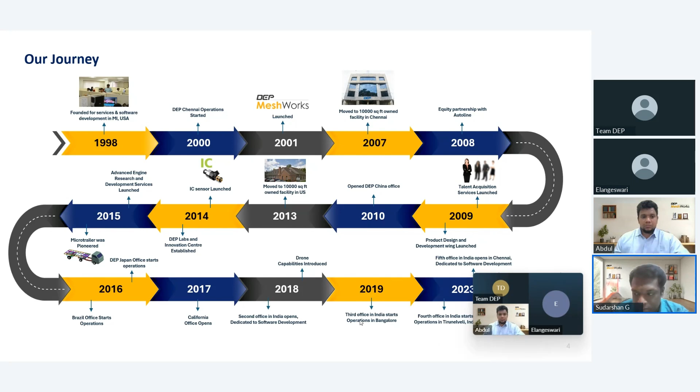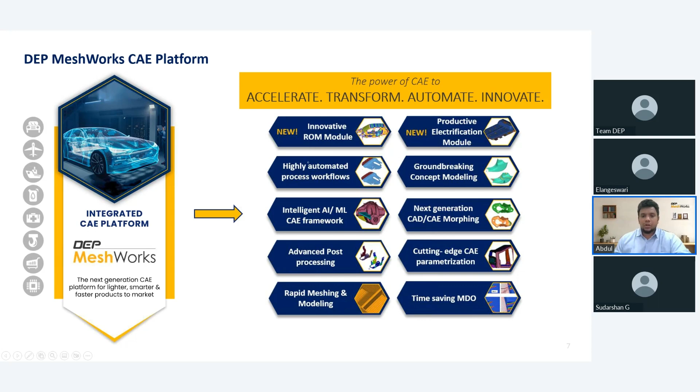In a product development cycle, whenever it comes to a new product development, it goes from the initial conceptual stage to the detailed phase, the virtual validation phase and the maintenance phase. There is a new product development cycle and an older product development cycle. In the older cycle, you can see a lot of time spent in the detailed validation, virtual validation and maintenance phases.

Why? Because not much time or involvement has been spent in the conceptual stage itself. In MeshWorks, we give the upper hand so the user can spend his time in the conceptual stage by doing all types of modifications, creating his own geometrical designs, etc. From there to the maintenance phase, we need fewer tools in the detailed virtual validation and maintenance phases, so less man effort is needed with MeshWorks. Our whole point is to convey how, with MeshWorks, one can save a lot of time in pre-processing, post-processing, and conceptual design stages.

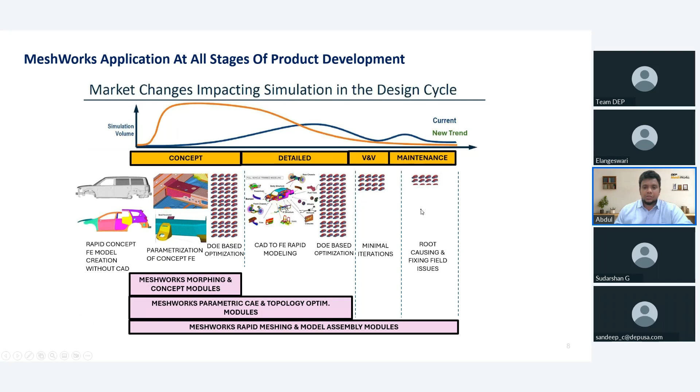In conceptual stages, MeshWorks gives a hand with ConceptWorks and also some morphing modules. In the detail phase, there are MeshWorks parametric CAE modules and topology optimization modules at a component level or an assembly level. And MeshWorks rapid meshing and modeling modules help across all the different validation stages. That is the main intention of today's presentation.

With that, I'll start with the first, which is meshing and modeling. When it comes to meshing as a pre-processing tool, we have automated all the different kinds of meshing with our machine learning algorithm integrated into it, starting from tetra meshing, be it plastics or sheet metal or hexa meshing, whatever it is.

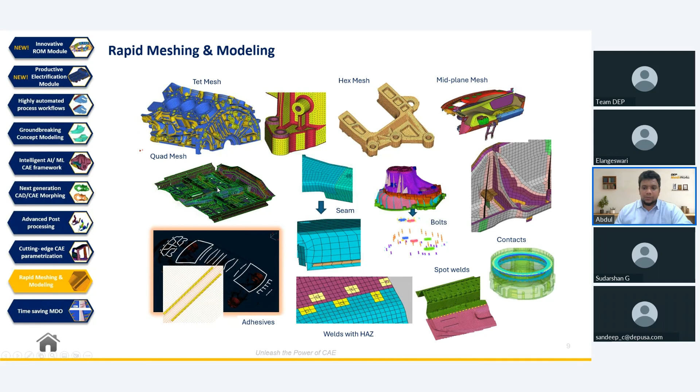So all the different sets of meshing have been completely automated, extensively benchmarked, and produce high quality, standard-rich mesh outputs. Once you do the meshing, obviously you need to go for the modeling.

But when it comes to meshing, the value you can expect from MeshWorks is that one doesn't need to do any kind of CAD cleanup in the prior stages. The user can directly take the CAD in and go for the meshing. And if the CAD is bad, you can go for the auto cleanup methods in MeshWorks. It will save a lot of turnaround time, in a huge way, when it comes to engineers doing the meshing hands-on.

And all the different types of meshing are under one roof. There is no need to switch between multiple software packages. You can club all the types of meshing into one particular tool, with cost and time benefits. And of course, you can see a 30 to 50% time reduction across all the variants of meshing modules. Once you do the meshing, obviously you need to do the modeling.

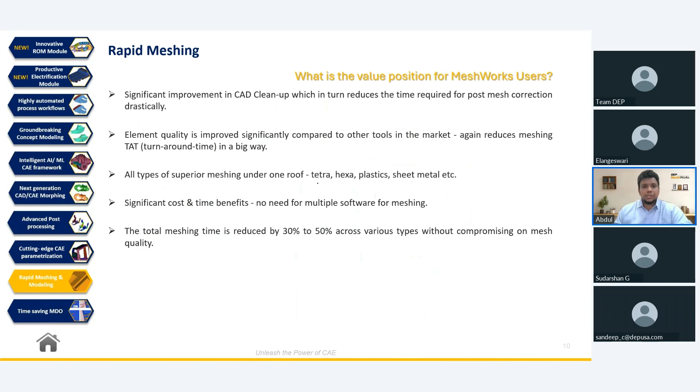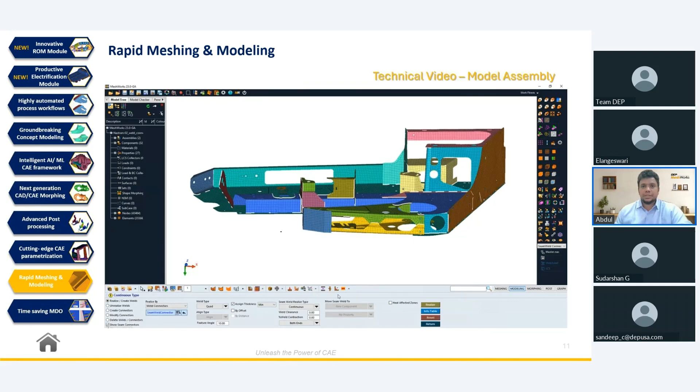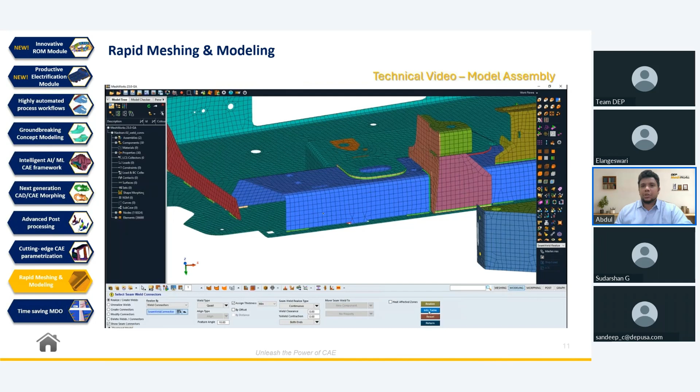When it comes to modeling as well, we have completely automated a lot of modeling approaches, starting from welding. For sheet metal meshing, if you want to do the connections, all you need to do is select the assembly of components and give the welds, and you can directly produce quad welds, V quads or rigid welds, whatever the type may be. You can weld across all the components automatically.

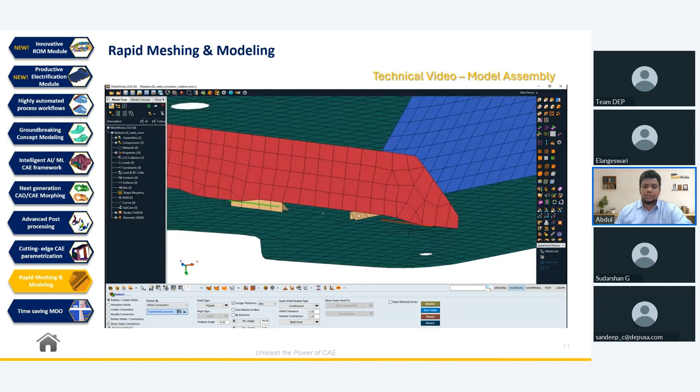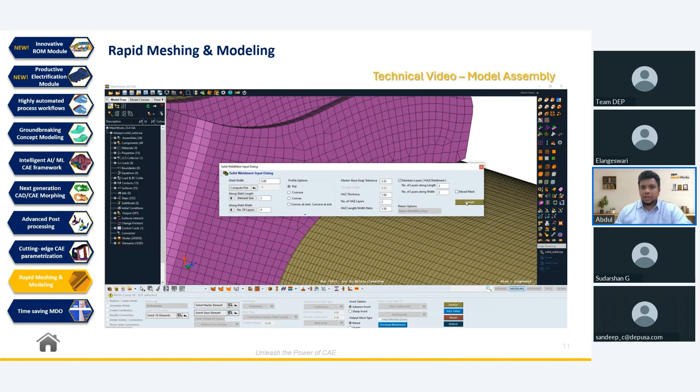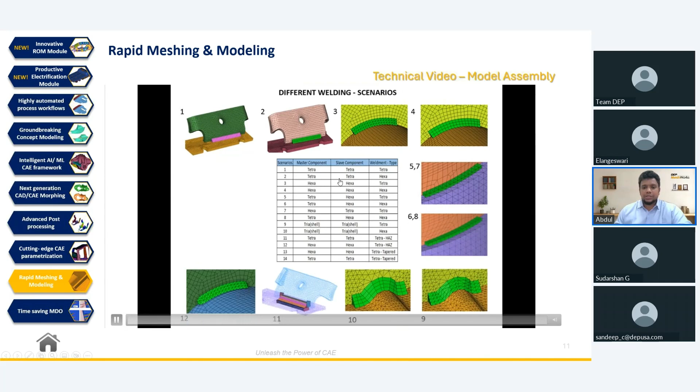And not only for sheet metal parts: if it's a 3D part and you want to create any kind of seam welding or 3D welding across different sets of combinations, for example tetra to tetra as a tetra weld, or a hexa weld between hexa and tetra components, whatever the combination or profile is, the user can create welds automatically in MeshWorks.

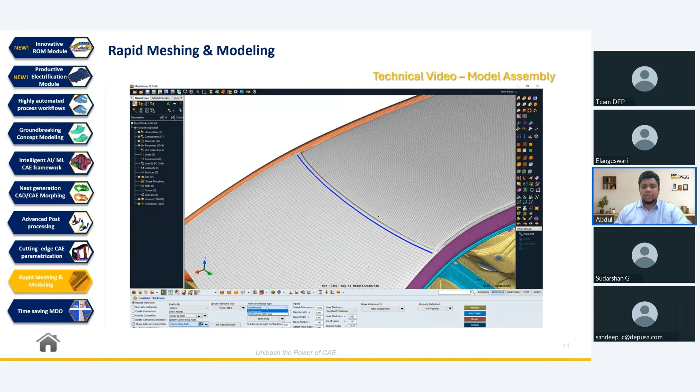And be it a full vehicle model or a component level, one can create any kind of welds, adhesives, all the types of connections in MeshWorks.

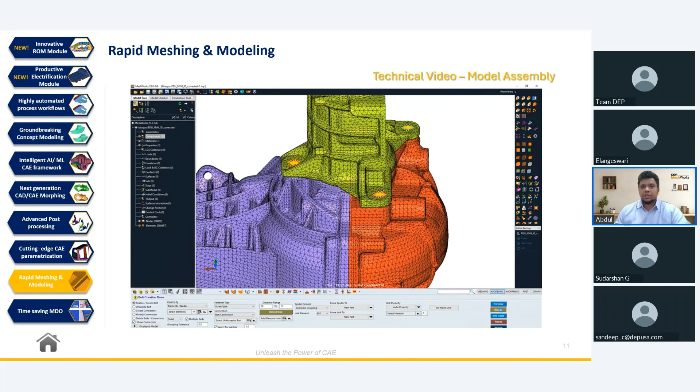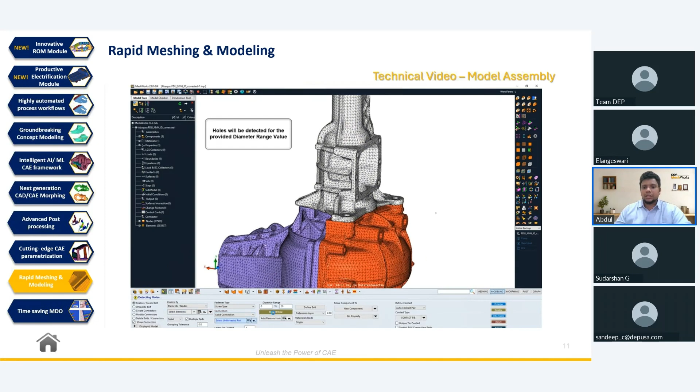And we have gone a step ahead. When it comes to bolting any kind of 3D component, we have template-based auto bolting functionalities, where one can create a 1D bolt or a 3D bolt directly on 3D parts. And once you create bolts, if the user wants to create a contact over the 3D bolts, to connect the bolts with the 3D parts, the tool will also take care of that automatically.

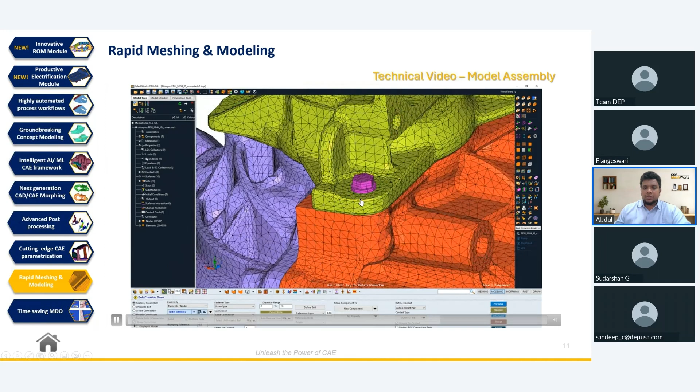Here you can see the bolt specifications the user can give, and you can create the 3D bolts directly. You can also define the contacts over the 3D bolts you are creating. So you can clearly see how the user can create a 3D bolt. For creating one 3D bolt manually, you can imagine the time it would take.

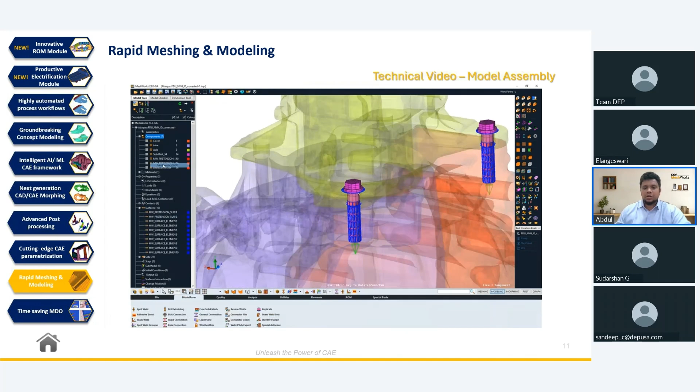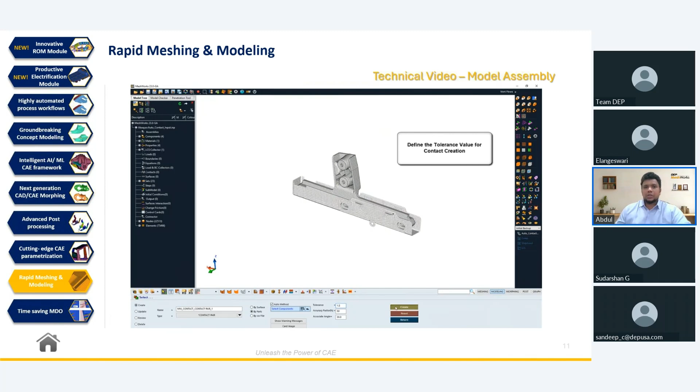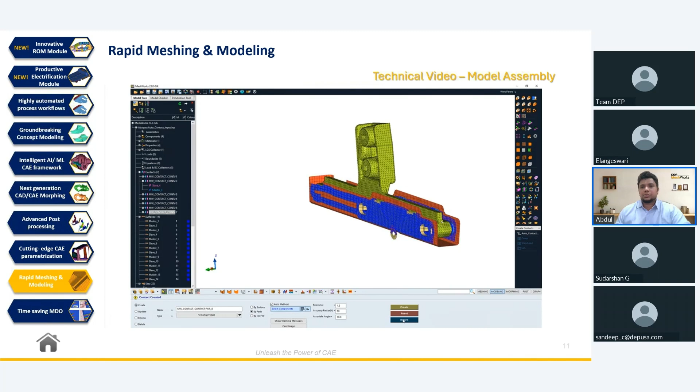And once you create a 3D bolt, the pretension, be it a head component contact or a shank component contact, can be created automatically in MeshWorks. Not only that, be it a component level or an assembly level, one can create contact surfaces, attach the components and give the interactions across multiple components automatically in MeshWorks as well.

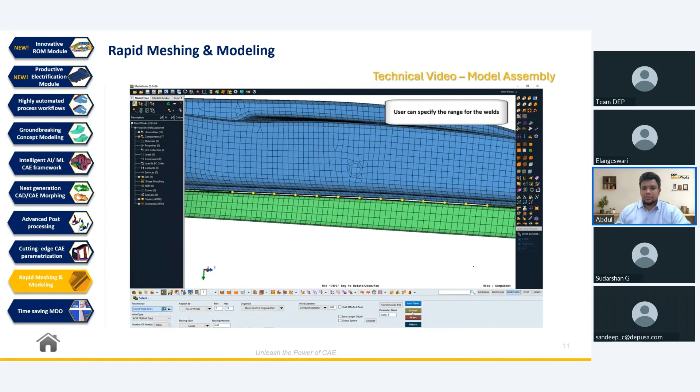And one more big advantage of the meshing and modeling functionality is that once you do the meshing, or create a contact or a connection in MeshWorks, you can completely parameterize it. For example, with this kind of spot weld location, if the user wants to parameterize these welds, he can specify the length of the weld, the width of the weld, or the number of welds in this particular region.

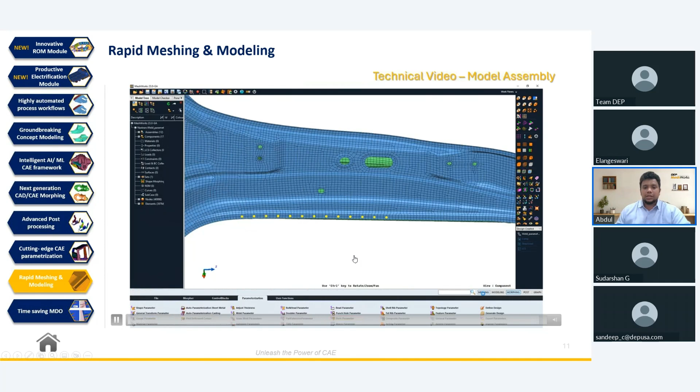Whatever it is, the user can apply the parameters. You can imagine that in a full vehicle model there will be more than thousands of welds, so this kind of parametric approach will save a lot of time, and also weight. So moving on to the next topic after meshing and modeling.

As I told before, these are the main advantages and values once you do the modeling in MeshWorks. You can save a lot of time in model assembly, in the assembly process of doing the connections. You can also create any kind of unique connections throughout all the different verticals of the components. And also the accuracy of the meshes: when it comes to 3D welding, we have heat affected zone creation over the 3D welding, which gives you accuracy of the results in heat propagation studies.

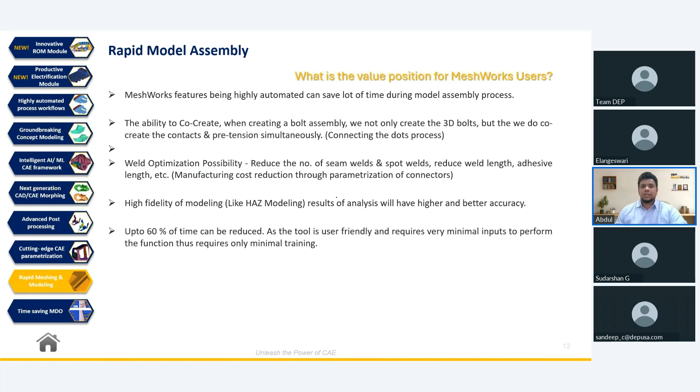And here as well, we clearly give you 60% time saving and time reduction over the manual effort. So this is how we reduce a lot of time in meshing and modeling functions. Once you do the meshing and modeling, we enter into the post-processing. When it comes to post-processing, all the animations, contours, measuring modules, or cut sections, these kinds of regular detailing tools are already richly enhanced in MeshWorks.

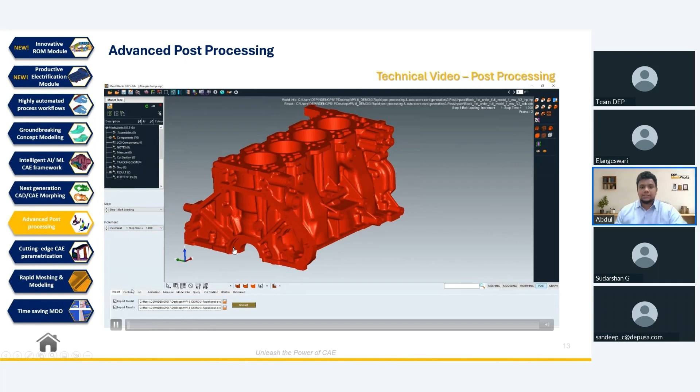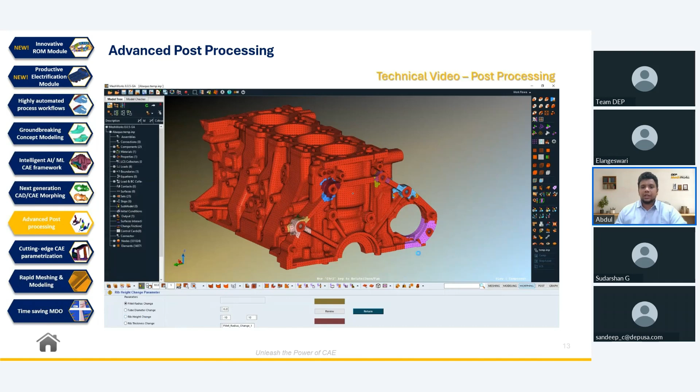Apart from that, what is very unique in MeshWorks is we give automated tool sets inside post-processing as well. For example, we have our hotspot extraction tool here, where the user can extract his own results, directly export those results into the pre-processing window, and perform parameters directly on this particular component to clear any failure regions or hotspot regions. As I told you earlier, when you do the meshing or modeling in MeshWorks, you can perform parameterization directly. This is one good example of that.

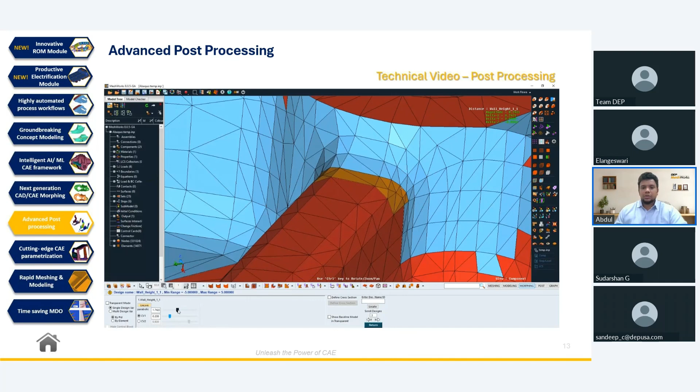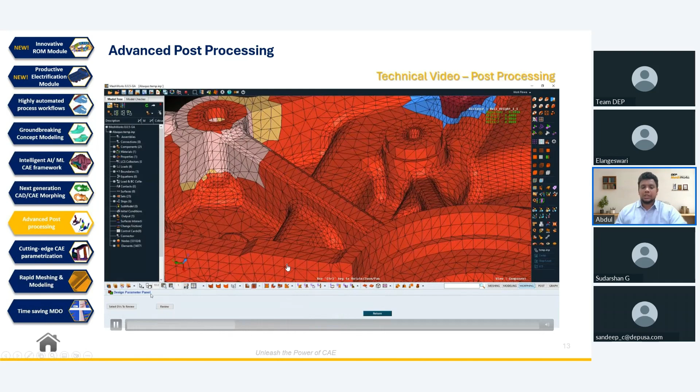Once you import the component into the post-processing window, one can perform these kinds of super cool parameters, like fillet radius change, tube diameter change, width change, height change, etc., directly in the MeshWorks window. One doesn't need to learn what morphing is here. He can directly pitch in, create these parameters and make this design pass. That's how good, efficient and accelerated it is to do the post-processing in MeshWorks.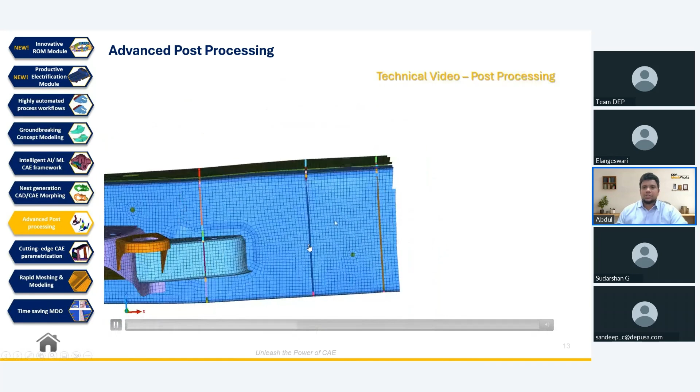And not only that, for the tetra components, you saw the auto parameterization. In a similar way, we have morphing and parameterization for sheet metal and hexa. So be it any kind of domain, you have parameterization integrated into MeshWorks, and you can achieve these kinds of shape changes with our advanced morphing, which I will talk about in upcoming slides. Apart from shape changes, if the user wants to integrate new features and strengthen the model more, we have a lot of design solutions and design enablers.

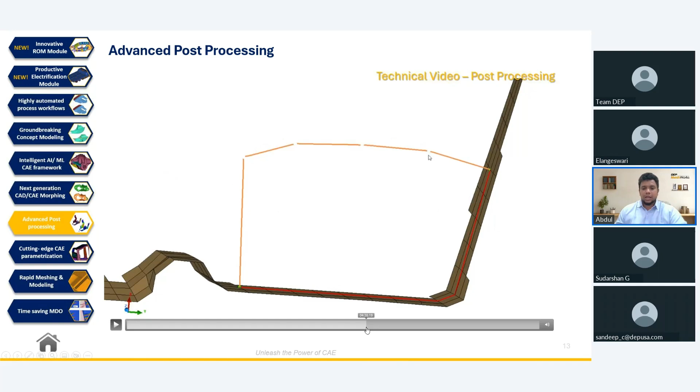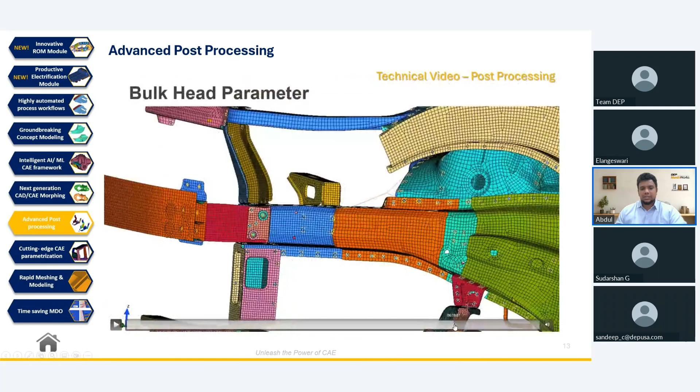For example, 3D ribs or sketching ribs for the user's desired profile. If the user wants to sketch a rib directly onto a cross section, he can specify the start point and end point, sketch the cross section and create a rib over the component. And once you create a rib, if you want to insert patterns, for example a honeycomb structure for a speaker grill, or strengthen these zones, we have multiple options like this to create it instantly. These are some of the design enablers, which are very unique to MeshWorks.

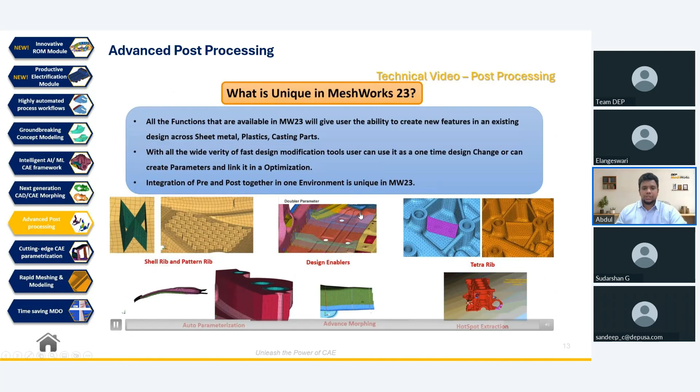So the value of the post-processing is, as I told before, we have a multi-disciplinary post-processor where you can import an Ansys template, an Abaqus, or a Dyna template, and perform your post-processing. Once you extract the results, you can achieve better products and perform auto parameterization, adding multiple shape parameterizations or design enablers. Moreover, we have rich industry-standard post-processing features in animation, contours, etc., and we integrate our auto hotspot extraction tool, which you already saw in a video.

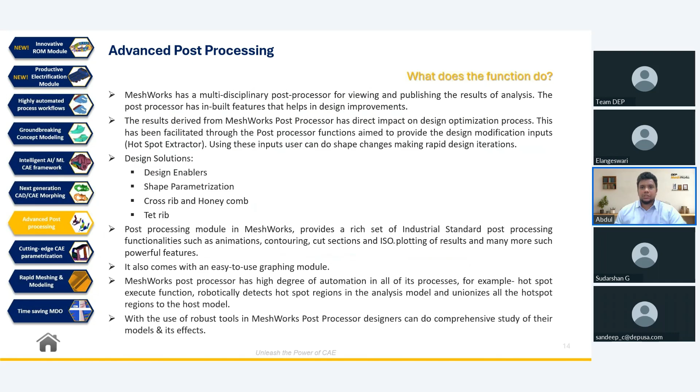And the most unique tool is that whenever you are able to extract the results, you can directly publish them as a PPT or as a web HTML document, which is an advantage for post-processing users. So when it comes to meshing, modeling and post-processing, you have seen a lot of time saving and also a lot of unique tool sets.

You can also accelerate your time with our process automation functions, where the user is able to automate his own daily process. His own unique day-in and day-out routine can be automated with just a 4-step process. All you need to do is record the process, and the user doesn't need to learn any kind of Python or TCL/TK scripts.

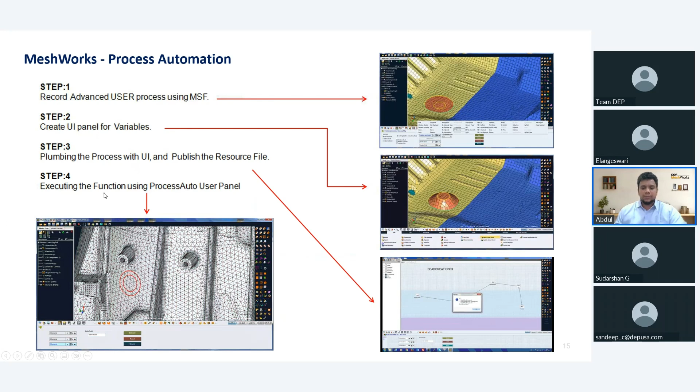The user can directly record the process he is manually following, and he can create a panel or a GUI for his own benefit, then club the process and the panel, create your own process automation and publish it to the users. That is how easily the user can create a process automation in MeshWorks. We have an integrated set of 60 plus process automations already integrated into MeshWorks, which you get along with MeshWorks.

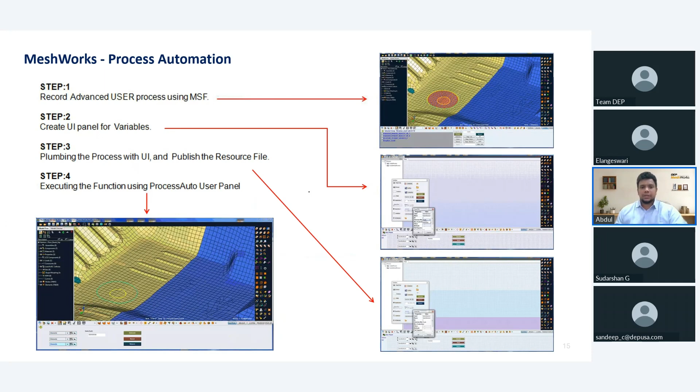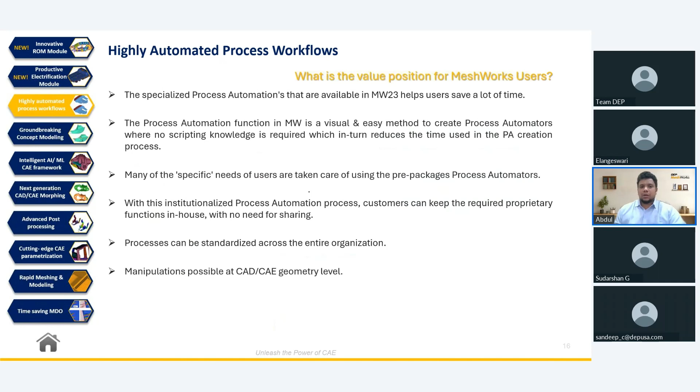And what is the use of process automation? As I told before, you can accelerate your time further. Apart from meshing time reduction and modeling time reduction, you can accelerate your timing further. It is very easy to use the process automation functionality in MeshWorks, and one doesn't need to learn any scripting languages for this. Apart from that, across the extent of CAD to CAE, one can create a process automation from start to end.

Okay, so moving on to the next topic, which is morphing. MeshWorks was widely called a morpher globally a decade ago, because we have been leaders in morphing for many years. Now we have enhanced our morphing capabilities further, and we are in advanced stages of morphing. So now I'm going to show advanced morphing. Before, we used to have generic morphing, like nodal based or block based. But in this case, I'm showing you extraction of the cross-sectional profiles for a rocker region or a sub-member.

One can do all the modifications at the cross-sectional level itself, be it a width change or a height change. This gives you more accelerated time, and it is very easy for the user to do this kind of morphing. Once you morph the component, it automatically converts the normal model into a morphed model. Along with it, you can observe that the nearby adjacent parts connected to the original component are also accounted for in this morphing approach.

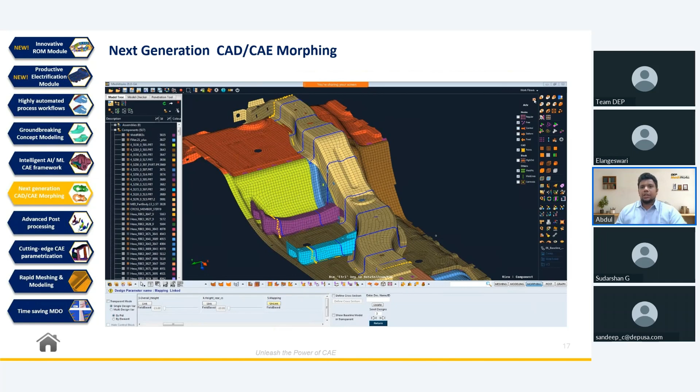That is how advanced our approach to morphing is, and it has been integrated at the component level and at the assembly level, and across different verticals, which you can see in much more detail in individual presentations on these topics. So after morphing, these kinds of shape changes affect everything in any industry vertical.

Let's take human factors ergonomics, dummy positioning or dummy seating, manufacturability processes, vehicle packaging studies, new facelifts produced in OEMs, and also structural and CFD performance. In all these verticals, one can parameterize the models across different domains, starting from shape parameters, gauge and materials, welds, adhesives, features, and special parameters like part extension or weld parameters. All these one can parameterize in MeshWorks.

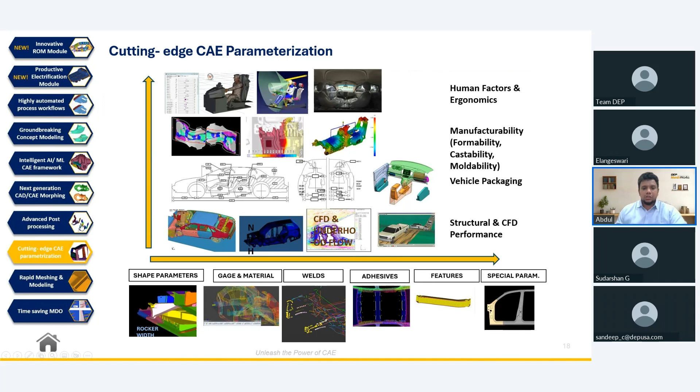So with morphing and parameterization going hand in hand, you can achieve MDO, which is multidisciplinary optimization. From a baseline design in one particular vertical, say a durability design, you can take it into MeshWorks, create multiple sets of parameters, and create designs of its own.

One particular domain can be imported and applied across all the different verticals. You can create an input-output matrix table, then send this matrix table to an optimizer tool, be it modeFRONTIER or an iSIGHT tool. Whatever it is, you can integrate it with MeshWorks and achieve the response calculation and get the optimized design. That is how we can achieve MDO using the morphing and parameterization approach.

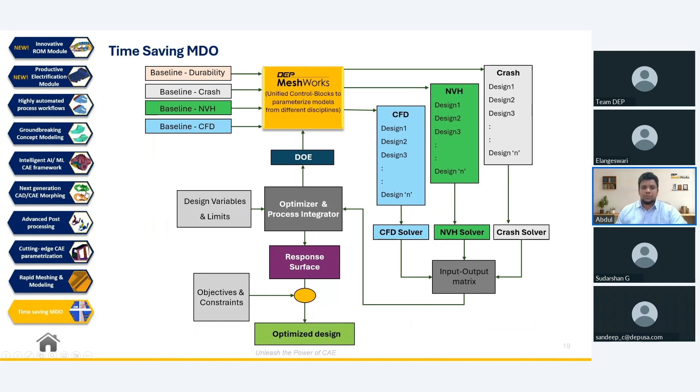This is all for the assembly level and also the full vehicle level. What if it's at the component level? At the component level, for time saving, one can optimize the component with a topology optimization approach, where you can pull in the model and make it a minimalistic design.

So reduce all the thickness, remove the ribs, remove the features - we have the tool sets for that. Then you create a design approach where the topology run has been performed, and it gives you results, something like where features need to be added or removed. The user gets the results, and from there, if the user wants to add a rib, reduce the thickness, or increase the thickness, whatever it is, the user can do it with MeshWorks. So this is how we optimize one particular single component from starting from scratch to an optimized design.

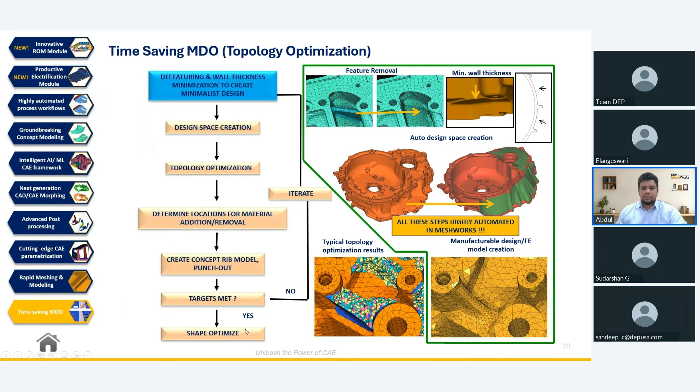Now comes our unique functionalities in MeshWorks I wanted to cover. One is our recent AI/ML CAE framework. This is very unique - whenever the user has built their models and sent them for analysis, after the analysis results, they get the output as results for stress-strain curves, etc. So without even doing the solving, one can predict the results. That is where we bring in this AI/ML technology.

We learn and teach our MeshWorks and also our machines with a lot of data accumulation, starting from operational data, engineering data, sensors, whatever you have, or unstructured data, even small written notes. You can take it into account and accumulate the data. Then from there, we generate multiple design models - math model generation, AI deep learning models, and also non-linear parametric models. All of those can be imported here.

With that, we can achieve the convolutional neural networking scheme, where one can deliver the final output model, and you can import any set of model and create any kind of parameter or shape change, whatever it is, immediately and effectively - one can view the results on the MeshWorks window directly without even solving the model.

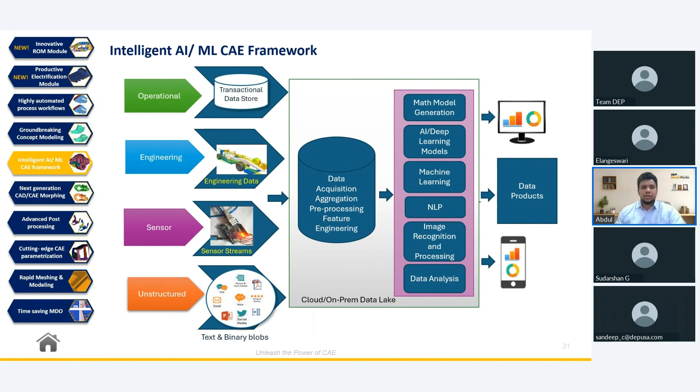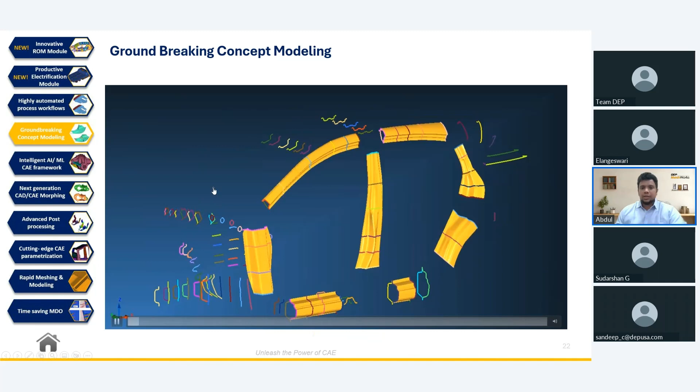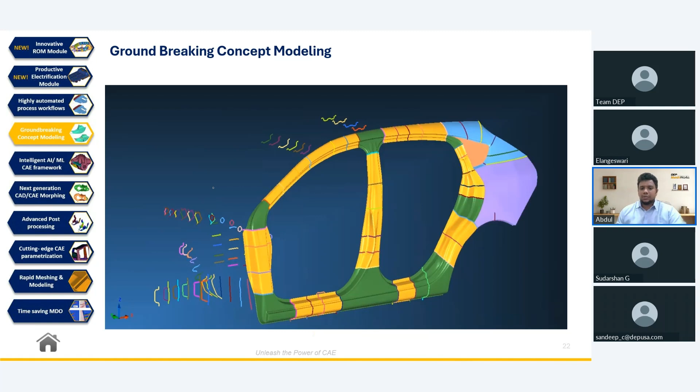This prediction is around 80 to 90% accuracy, which we can achieve via the AI/ML framework. After that, one of our patented technologies is our ConceptWorks module, where one can sketch and create cross-sectional profiles, and also any kind of members or 3D structures directly from scratch without even CAD design. One can start from node sketching and create their own designs directly into it.

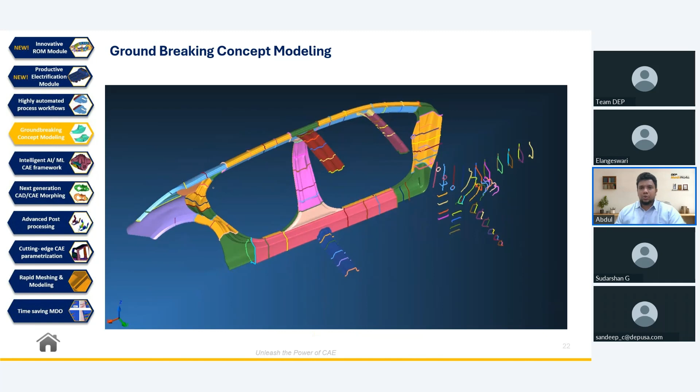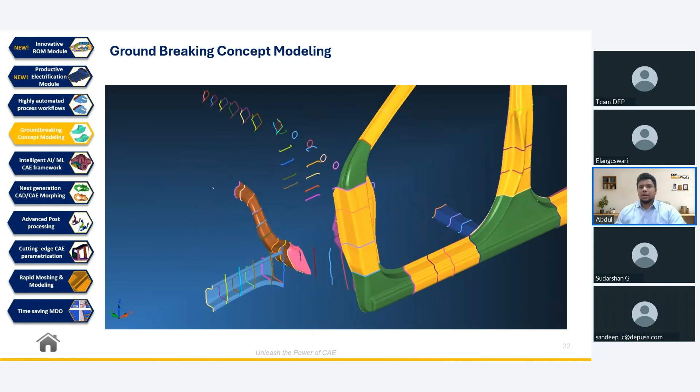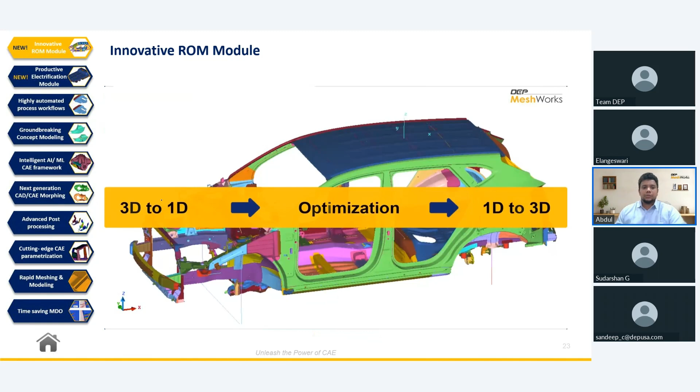You have seen about our time saving in meshing, modeling, and morphing, etc. We also give you the upper hand over solving time saving here, which is converting your 3D models into 1D models for solving. Two days of runtime can be reduced into two hours. You convert the 3D models into 1D models in MeshWorks directly with our ROM approach, which is called Reduced Order Model, where the user can create the 1D models.

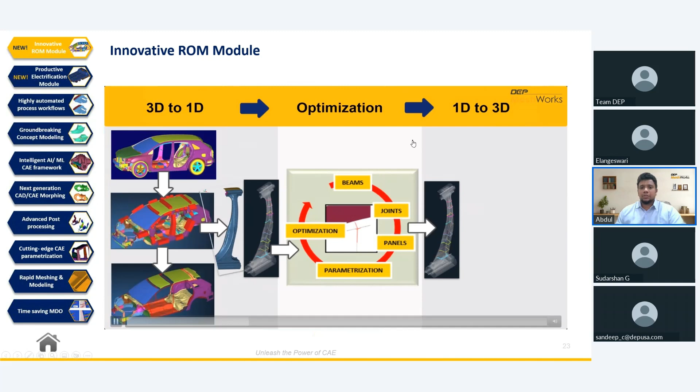Then the user can do all the optimization like morphing, parameterization, or MDO, at the component level or extending to the assembly level, whatever it is. Then they can generate again from the 1D model to the 3D model with our ConceptWorks tool sets.

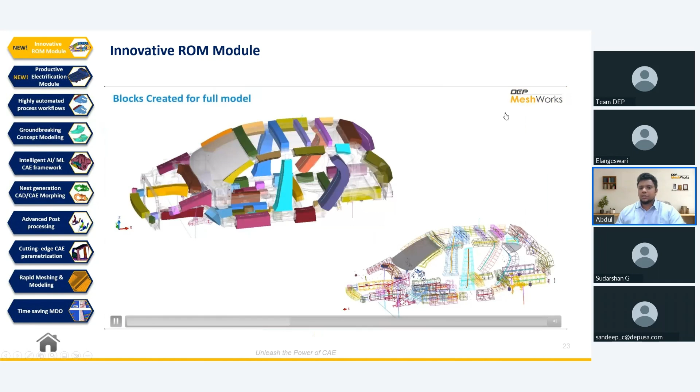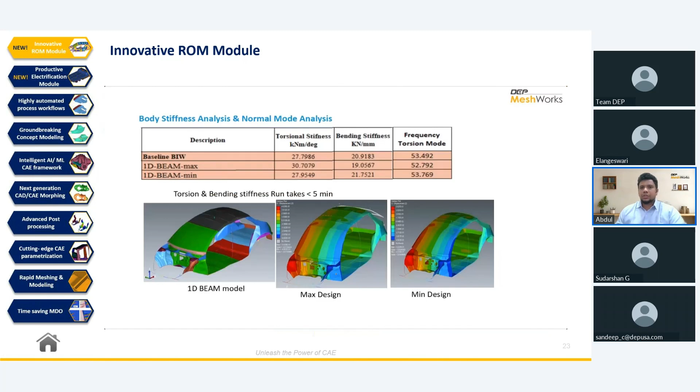So this is the entire workflow that we give to the users. If the user wants to perform the simulation for the front end crash and wants to completely neglect the rear end, we can convert the rear end as a ROM module, and similarly for the side impact crash. This gives a quick turnaround time for runtime, saving more than 50% of solving time, while also enriching the accuracy of results.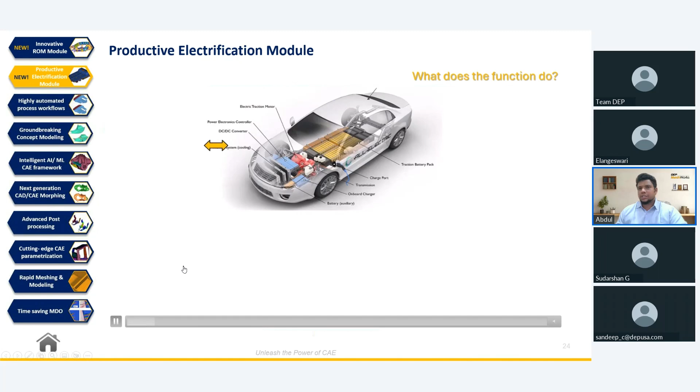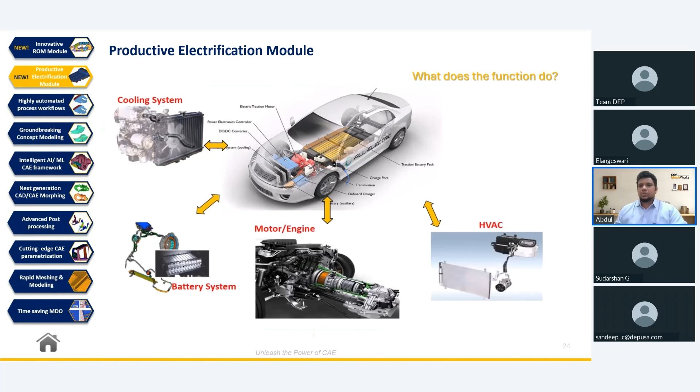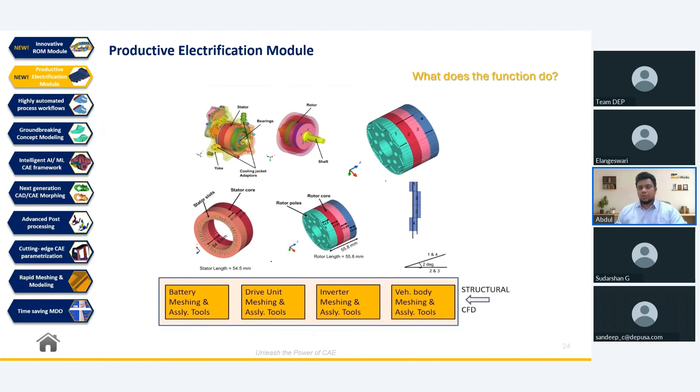So this is our ROM module, and lastly our Productive Electrification Module. I'll quickly touch upon this new module, where you can see our industry standards going ahead with the electric path of converting conventional vehicles into electric vehicles. One can do all the machine modeling, performing simulations and ConceptWorks, etc., everything for the electrical domain. We have set it as a separate domain module in MeshWorks.

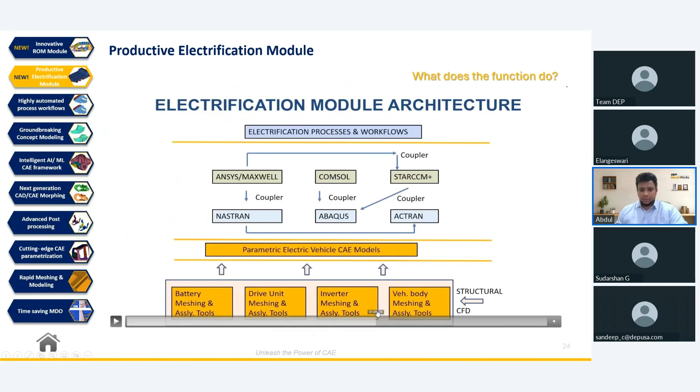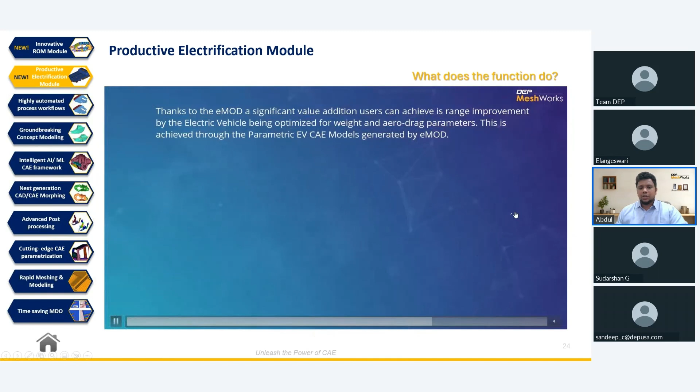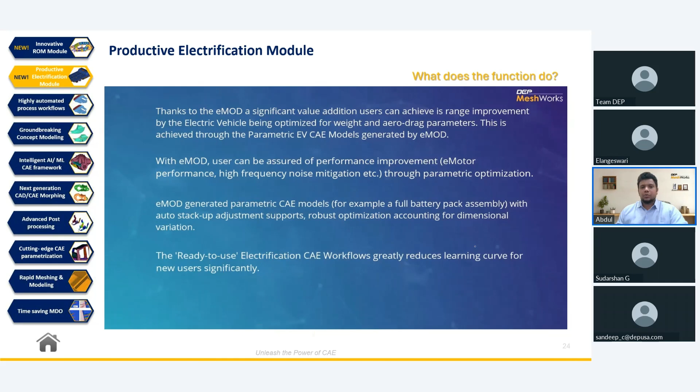So you can see how one can perform all the different operations. For example, this particular example is converting the entire conventional vehicle, where we have the drivetrain path and all, which can be completely converted for a battery pack, and you can achieve this in no time. So we have a separate module developed only for electrical vehicles.

And as a conclusion, we can see all the different modules in MeshWorks, so nothing has been missed out, and you can save a huge amount of time, including machine time and manual time. When it comes to MeshWorks, we categorize ourselves as transform, accelerate, automate, and innovate.

To give a glimpse, transforming components or any kind of modeling into CAE, CAD morphing, or CAD. Whatever the morphing approach, we can get into concept modeling or whatever it is. So it's all about transforming your conventional CAE approach into a different domain.

Accelerating additionally means we give an upper hand with accelerated workflows, something like ROM modeling, converting your 3D model to 1D models and 1D model to 3D model, etc., where you can save a lot of time, like 30 to 70% of manual time.

And then automation, how one can automate his own already finalized process, and you can see the time differences of more than 50% there.

And innovation is, whenever we grow, we also grow along with our competitors. We do extensive benchmarks and innovate something very new and give it to the market. In that case, we have our eMOD functionality, be it a ROM module or a ConceptWorks module, whatever it is, we are patented and also very unique, and we are innovative in those approaches.